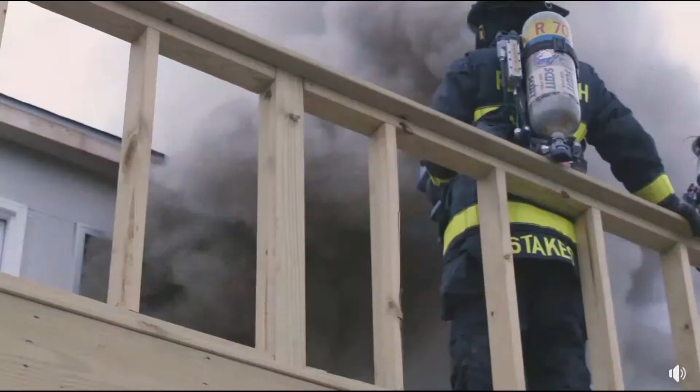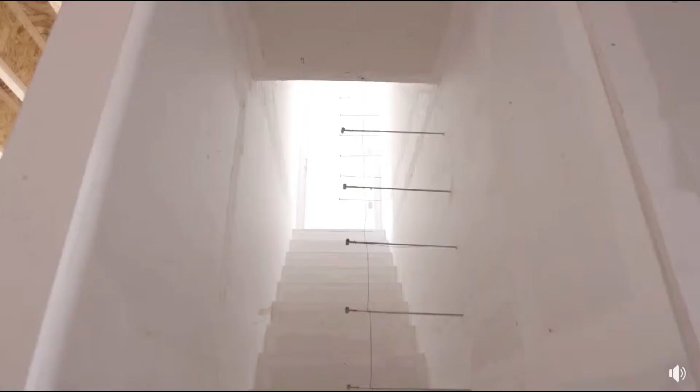We wanted to look at basement fires because as firefighters ourselves, we know that these are inherently more dangerous both for the occupants but also for firefighters. When we're looking at basement fires, we have limited access from the interior and often from the exterior. So that not only affects how we fight the fire from a fire suppression standpoint, but it also significantly impacts ventilation and the survivability of people inside the building.

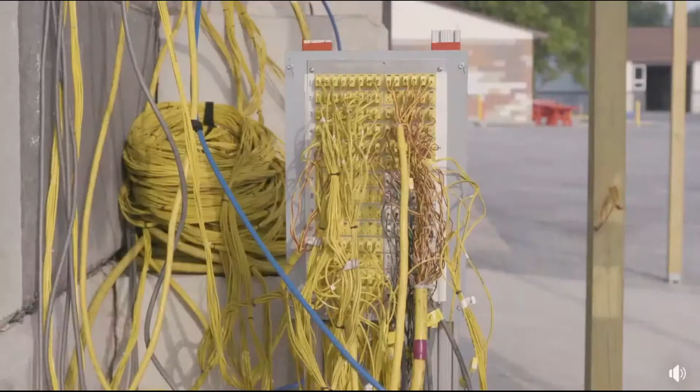They can all be deadly, and they all have their own specific hazards. But we have to understand what those hazards are, what our limitations are, what tactics we can use. And the test in here clearly shows us what our best options are.

Hi, my name is Tony Carroll. I'm a battalion fire chief with the District of Columbia Fire Department and an Eastern Region Director for the ISFSI. I have been fortunate to be involved with the basement fire study that was undertaken by ISFSI and ULFSRI. I am currently one of the ISFSI instructor cadre that is teaching the 8-hour class called Understanding and Fighting Basement Fires.

In order to develop this class, ISFSI gathered fire chiefs, officers, and researchers that had significant experience with basement fires. In some cases, the experience was the result of line-of-duty death due to a basement fire. This video will provide you with a brief overview of the study and present some of the key findings.

The tactical considerations can be summarized into 3 points. 1. The need for a thorough size-up. 2. The importance of recognizing ventilation-limited fire conditions and the need of coordinating the attack. And 3. Getting water into the below-grade space quickly is needed to reduce the risk of the fire growing and transitioning to flashover.

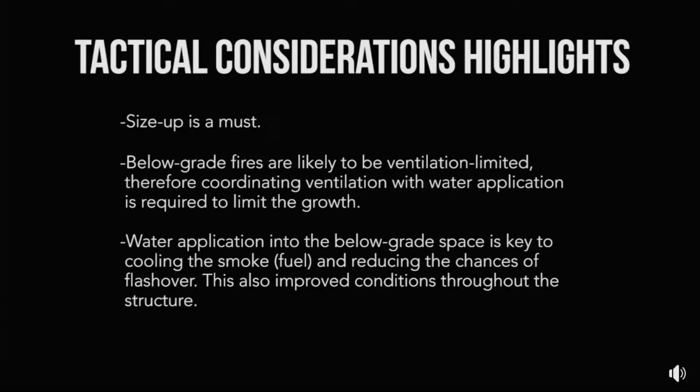This class has 7 modules. Module 1 reviews previous basement fire research as well as basement-related line-of-duty deaths. The technical advisory panel also reviewed this information to determine the objectives of this study. Module 2 defines and discusses the types of basements based on access. Module 3 and 4 contain the science to aid in the understanding of why certain suppression methods work the way they do and how PPE works to protect firefighters from the fire environment.

Module 5 covers each of the experiments in detail. Module 6 is focused on the tactical considerations, and Module 7 shows you other information resources that you can use to learn from and teach with.

We have all heard of incidents where firefighters were hurt or killed while fighting a basement fire. Based on a review of basement fire incidents, 2 key hazards were identified. 1, the potential for structural collapse, and 2, firefighters getting caught in the exhaust portion of a flow path.

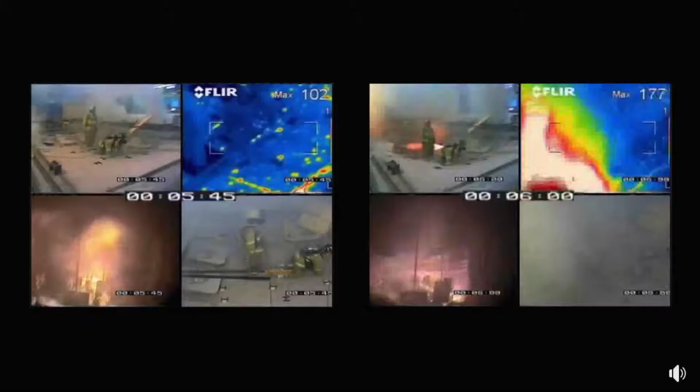Several studies have been conducted by UL and others examining floor collapses of both legacy and modern construction. However, only a small amount of research was conducted on the suppression component of fighting basement fires. So fighting basement fires became a key objective of this study. The panel also developed a list of questions that had not been answered in the previous studies. These questions shaped the experiments that would be conducted.

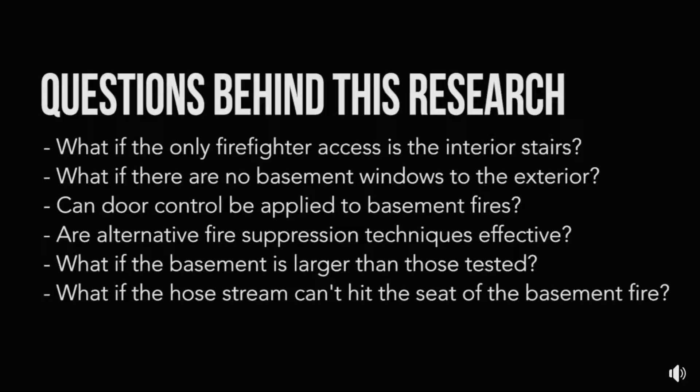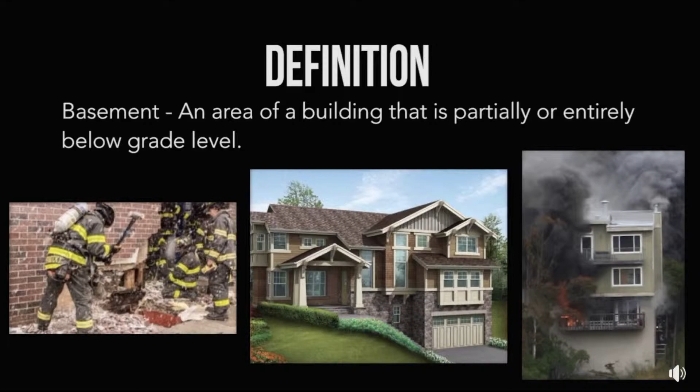Across the nation, there are many definitions of a basement. For our purposes and to provide a common definition, a basement is an area of a building that is partially or entirely below grade. One of the features that makes basements different from each other is the available access to the basement. This access goes hand in hand with the potential ventilation that a basement fire would have. We have classified basements into 3 categories based on access: no exterior access, limited exterior access, and exterior access.

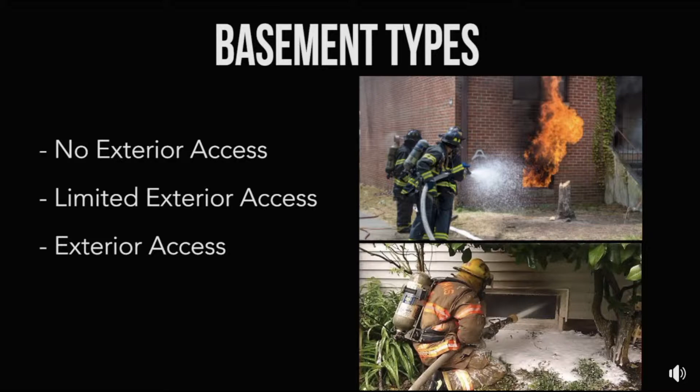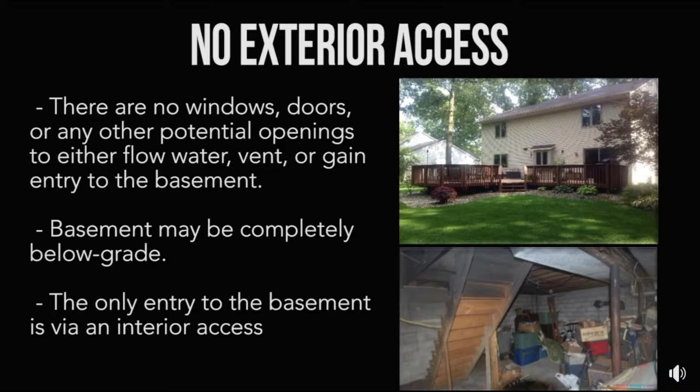No exterior access means that there are no doors, windows, or vents that could be used to enter the basement from outside the structure or could be used to flow water into the structure. The only firefighter access would be to enter the building and enter the basement by an interior stairway. A basement fire in a house with no exterior access will become ventilation limited very quickly.

The second basement category is limited exterior access. The access vent could be a window or a grate on a crawl space. Anything that, if opened, would allow smoke to exit the basement or air to enter the basement. The opening would also allow water to be flowed into the basement from the outside.

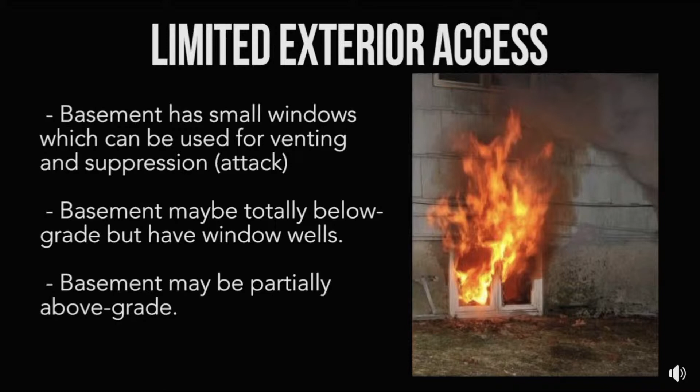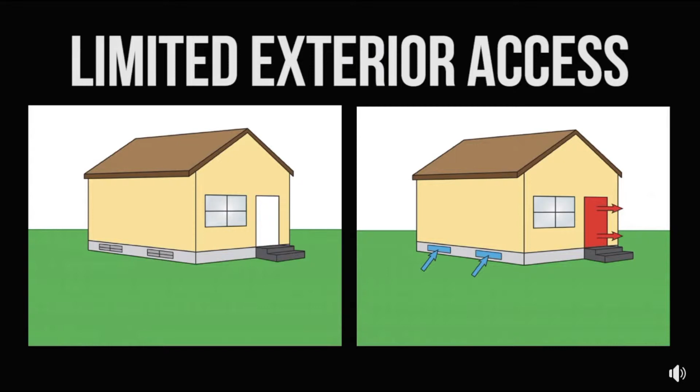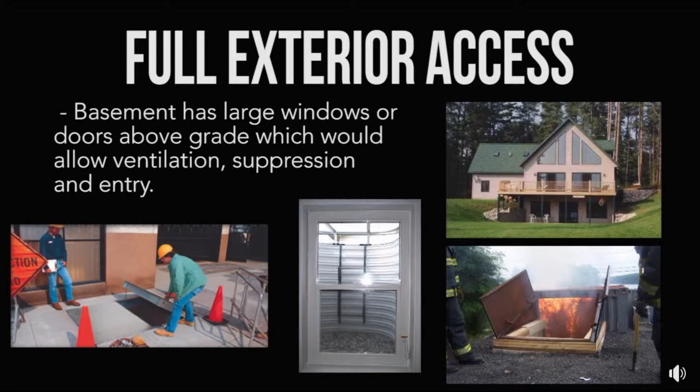The basement with windows or vents that would allow air to flow into the basement will be able to sustain a larger fire, and therefore it can generate more heat and toxic smoke. Full exterior access to a basement is an opening such as a large window or door that would allow a firefighter to enter the basement directly from the exterior to extinguish the fire. Full exterior access typically means that enough air can be provided to the fire in the basement to enable flashover.

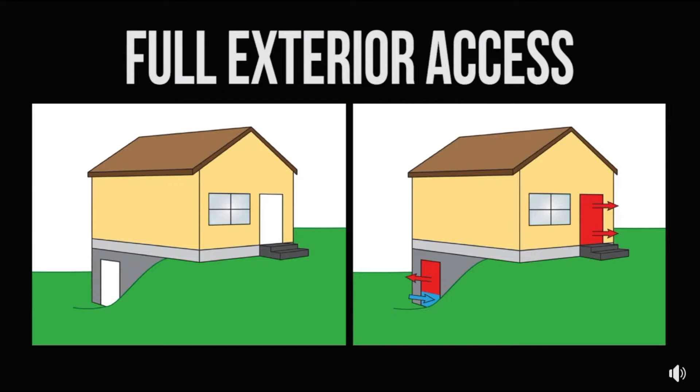Let's say that we have a ventilation limited fire in a basement with exterior access. If openings are made on the basement level and the floor above, untenable conditions for both civilians and firefighters can occur within a matter of seconds. The experiments were conducted in a structure built to accommodate 3 different access or ventilation conditions. For no exterior access, all initial firefighting actions would occur from the upper deck or ground level, and all potential openings to the basement would be sealed.

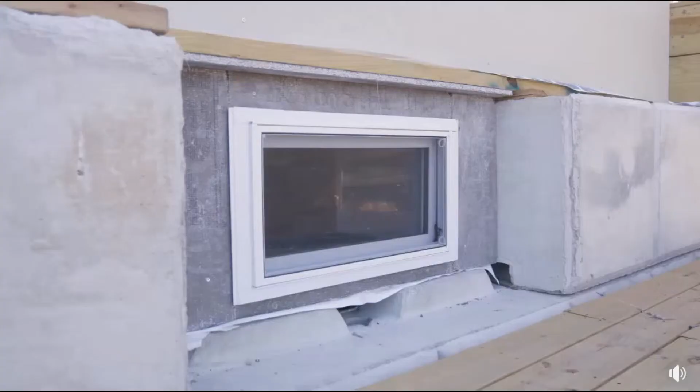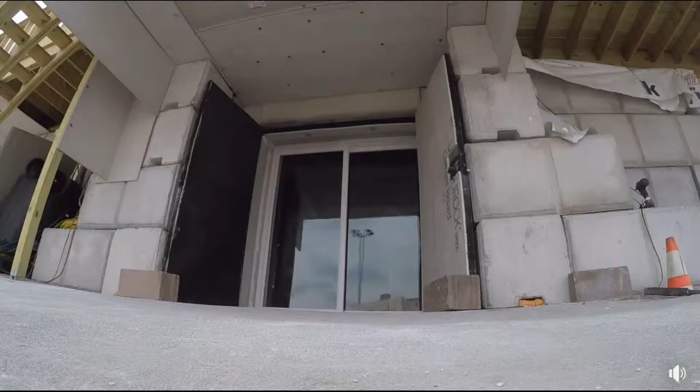For the limited access case, the structure had 4 side windows, which would allow smoke or air movement, and it could be used as a point to flow water into the basement. For the full exterior access case, a sliding glass door and an escape window were installed at the basement level at the rear of the structure. These would allow access for a firefighter to make entry into the basement.

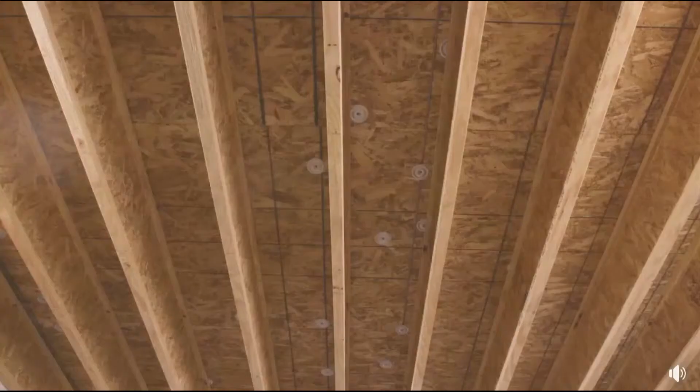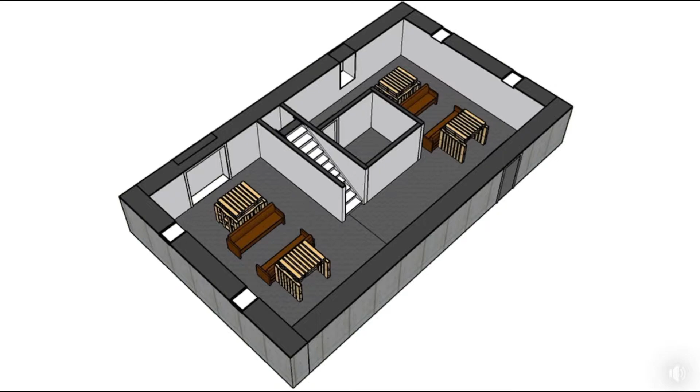In addition to the fuel load provided by the exposed wood I-joists and the OSB on the ceiling, movable fuel loads such as 4 sofas and 20 pallets were positioned on both sides of the basement. Each of the sofas was capable of providing a peak heat release rate of more than 4 megawatts. In other words, there was plenty of fuel to create a realistic ventilation limited fire condition in the basement. The basements have plenty of fuel. It will be a fuel rich or ventilation limited environment.

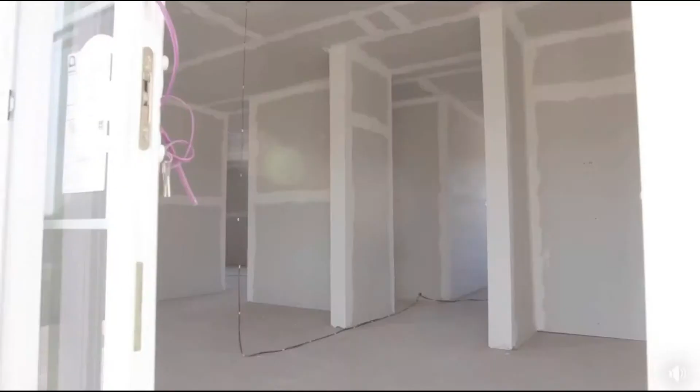Instrumentation for measuring the fire environment was installed both on the upper level and the basement level of the structures. The data from these instruments were used to determine the hazard generated by the fire throughout the entire structure, as well as the change created by the fire attack.

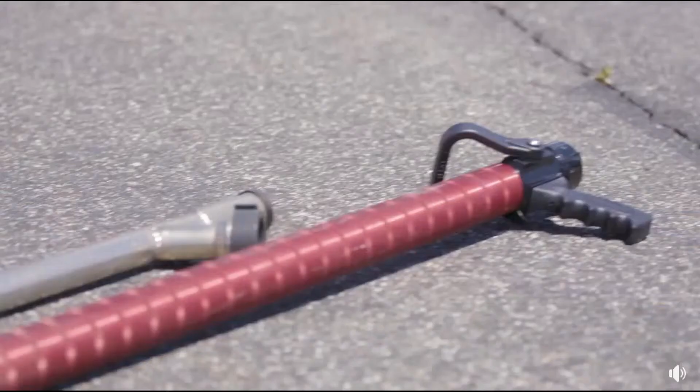As part of the ISFSI project on understanding and fighting basement fires, we're examining a number of different nozzles to give firefighters options. Some basements have no exterior windows or any access through an exterior door, so their only access is through an interior stair. So we're examining the fire dynamics of that type of fire, and then looking at options of making a hole just inside the door threshold and perhaps using a straight stream nozzle or a fog nozzle, or perhaps a piercing nozzle, a fog nail, or some sort of cellar nozzle in order to cool it off, prevent any type of chance of flashover prior to making entry and going down into the basement.

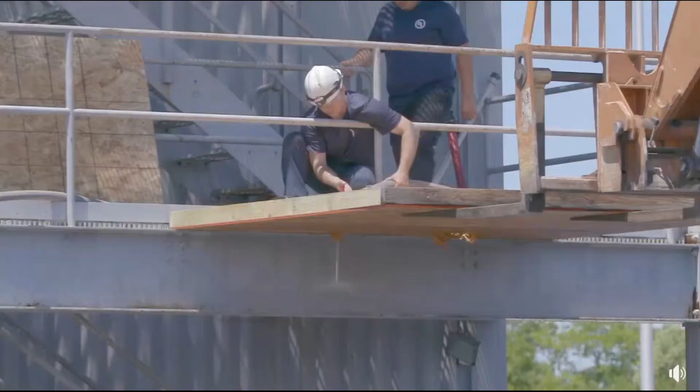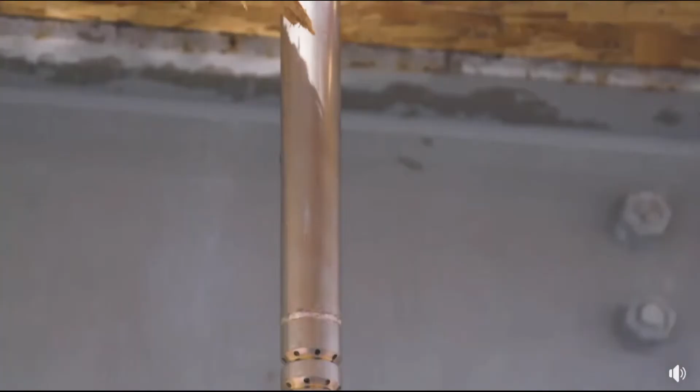So we're doing some flow testing of the nozzles just to look at their pattern, look at their flow rates, things like the fog nail, very small device. It flows on the order of 15 to 17 gallons per minute, produces a pretty fine spray of water droplets near the ceiling. The piercing nozzles also do a similar thing. They flow on the order of 125 gallons a minute. Some of the piercing nozzle designs where you'd pound it down through the floor give you a fairly fine spray or mist that extends out 8 to 10 feet and would again cool the wood underneath, cool the gases. People use them for attic fires as well.

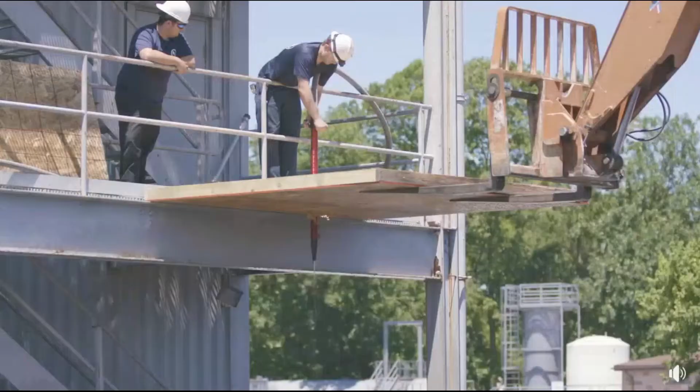And then other piercing nozzles have more of a discharge out and down, and they can flow up to 200 gallons a minute. And as you increase the pressure and the flow rate, the water droplets get smaller in those cases as well. And again, the idea is to get the water on the surface of the burning ceiling of the basement, the unprotected wood ceiling of the basement. That's really the bulk of the fuel, and that's one of the higher challenges of knocking out that basement fire.

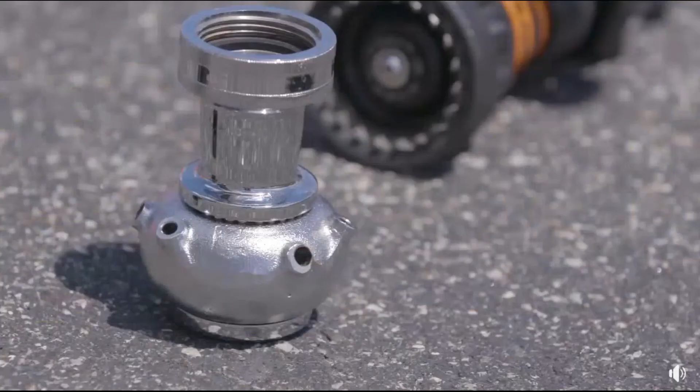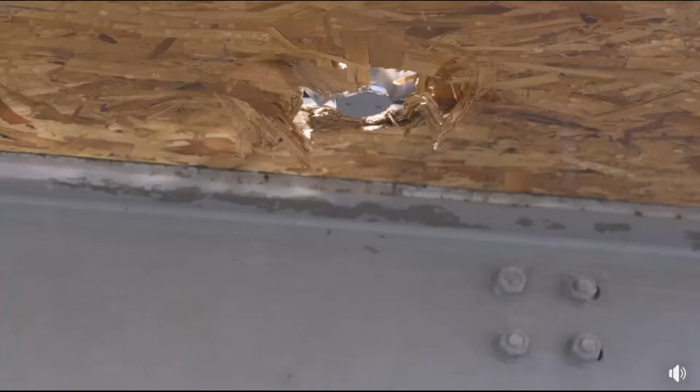We sort of have 2 different types of cellar nozzles that we're working with. One is the Bresnan distributor, which is sort of the classic cellar nozzle, and it has solid streams that emit from it and rotate around, again throwing water up and against the ceiling area to cool the wood and the floor assembly that's on fire. And then we have another version that's also a rotating applicator type nozzle, except it has 4 fog nozzles on it that whip around and have a fog spray that's again cooling the ceiling, cooling the gases, trying to distribute water through the basement with a throw of at least 10 feet, maybe 12 feet in some cases.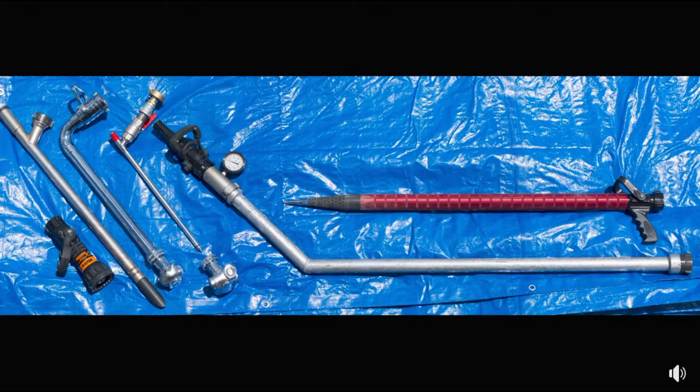As you can see in this photo, we use an assortment of nozzles and appliances in the experiments. Most of these designs have been around and used by the fire service for many years. During the summer of 2017, 12 multi-part experiments were conducted examining the 3 basement access conditions and the use of various hose streams, nozzles, and appliances. Hundreds of people from fire departments across the country had the opportunity to witness the experiments.

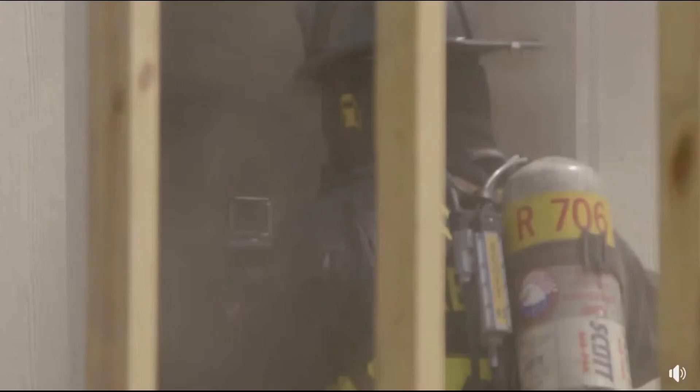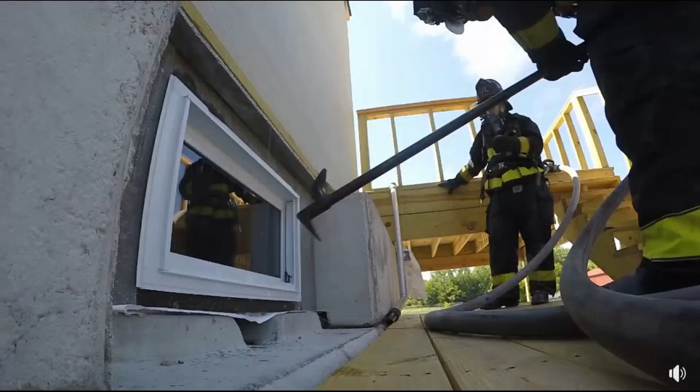The study led to a wide range of tactical considerations. We will discuss a few of the tactical considerations here. Size up is a must. If you can locate the seat of the fire and identify the geometry of the structure, for example, the presence of a basement and the type of access it has, you will be able to conduct a more effective fire attack. Depending on the basement access, cues the fire may be showing you upon arrival could be misleading. Remember, nothing showing means nothing. Assume lightweight construction and a ventilation limited fire and take appropriate actions until you can prove otherwise.

It's imperative that the first arriving company officer conduct a 360-degree size up. In our incident, the initial arriving company officer did not conduct a 360-degree size up. Had she conducted a 360-degree size up, she would have found that the access to the basement would have been more direct and a lot safer approach to the extinguishment. And I can't emphasize enough that the 360-degree observation or view or size up is critical on every incident.

Below grade fires are most likely going to be ventilation limited fires. If you have excess fuel and heat in a fire compartment and you add oxygen, the fire is going to get larger and hotter. Therefore, it is important to coordinate ventilation with your suppression actions. In some cases, the best move may be closing the door at the top of the basement stairs or keeping vents to the basement closed until the line is charged and in place.

One of the things that's critically important that we've all known is the importance of coordinating ventilation and fire attack. You just cannot overstate the importance of that, of good communication, of crew integrity, of strong incident management presence and incident command to make sure that those functions happen as closely as possible, and even if they don't happen together, that they're happening in a coordinated way, because there's so much variation in buildings and the built environment from coast to coast. But I think one of the things that holds constant is this criticality of ensuring that ventilation and fire attack are coordinated and that you have good control of the incident.

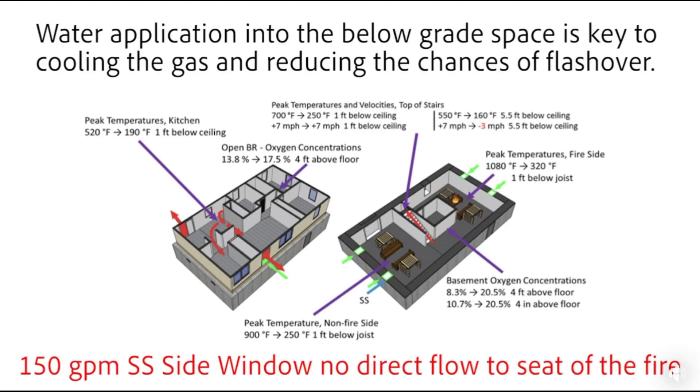I hope this video has made you want to learn more about understanding and fighting basement fires.